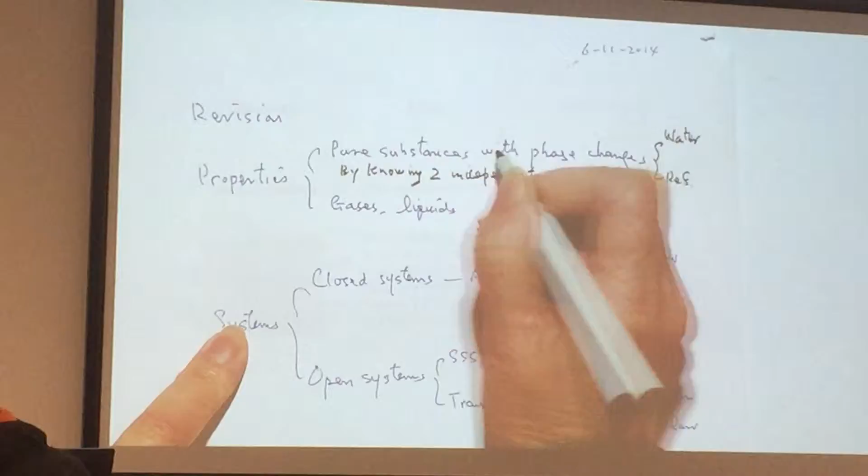We have used these methods since week 1, right? If we still say we can't remember, then our memory would be shorter than a fish's. Anyway, I just make a line here.

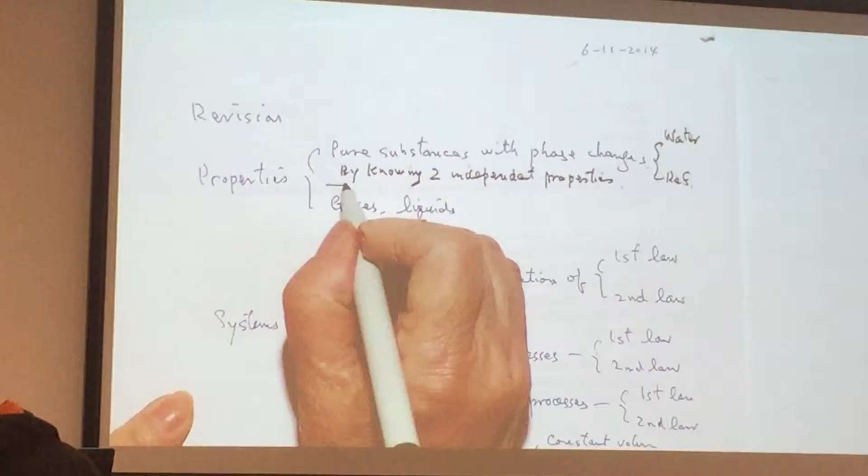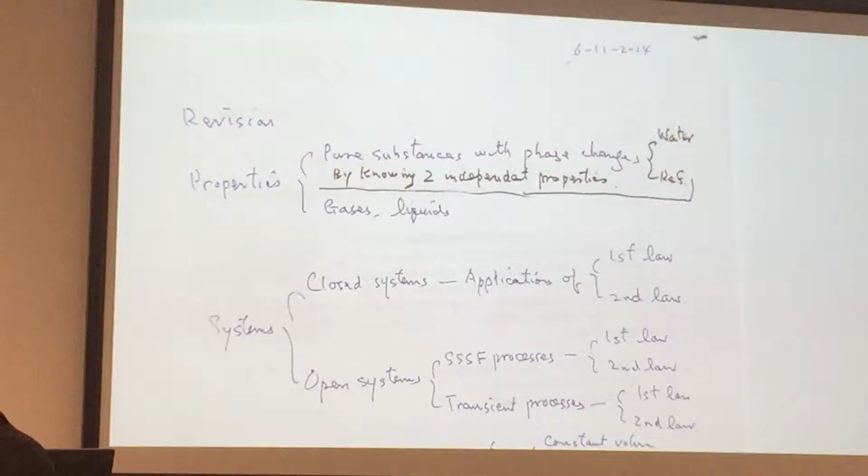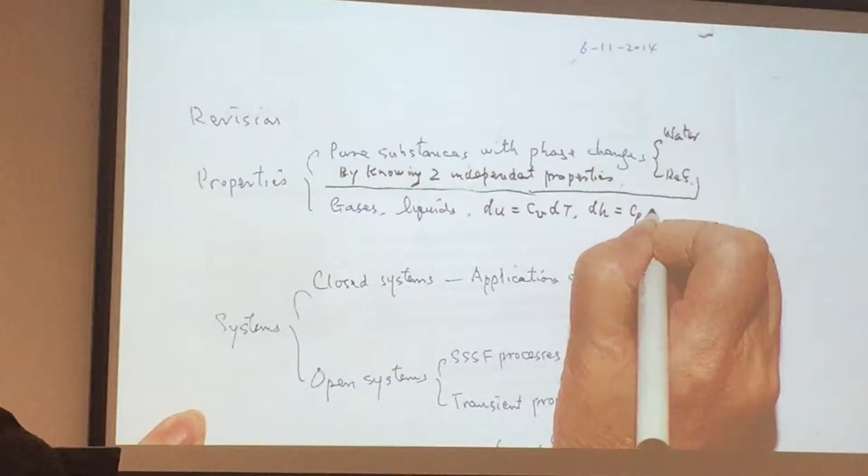And then ideal gases: we have PV equals RT, we have dH equals Cp dT, dU equals Cv dT. And also we have the formula for calculating the specific entropy change. I'm going to leave space for it later.

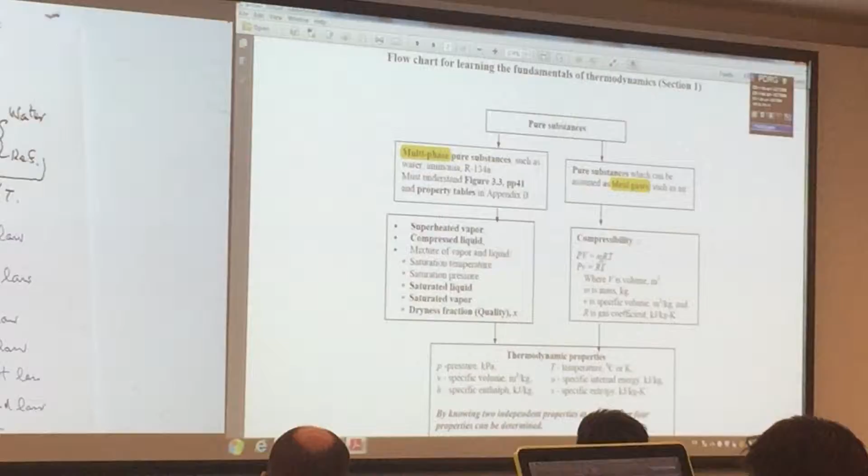And also in the study guide, on the second page, there is a flow chart to show you how we learn in order. Here I just highlight multi-phase pure substances. Actually, we have only dealt with water and refrigerants. And then ideal gases. And what are the 6 properties?

If we still don't know what the 6 properties are, we'll be in trouble. So I just listed, in week 1, the ideal gas law. And then all these concepts, do we understand them? Do they look very strange to us? What's saturation pressure? What's saturation temperature? What's quality? Why do we need quality when the state is inside the saturation region?

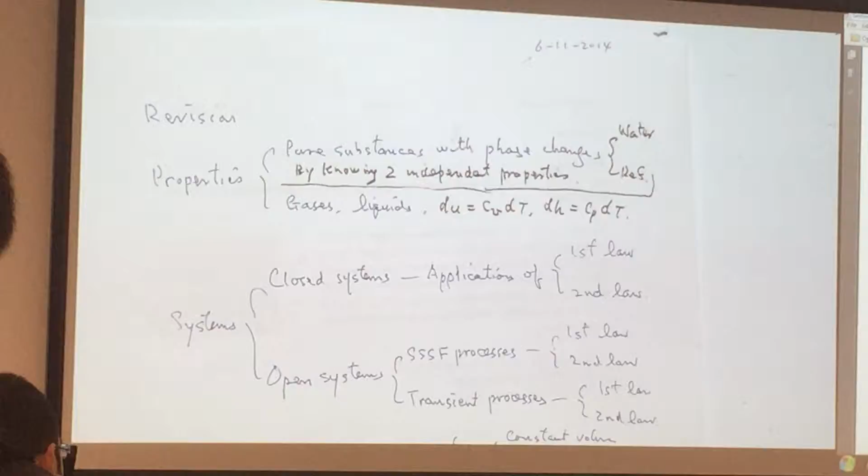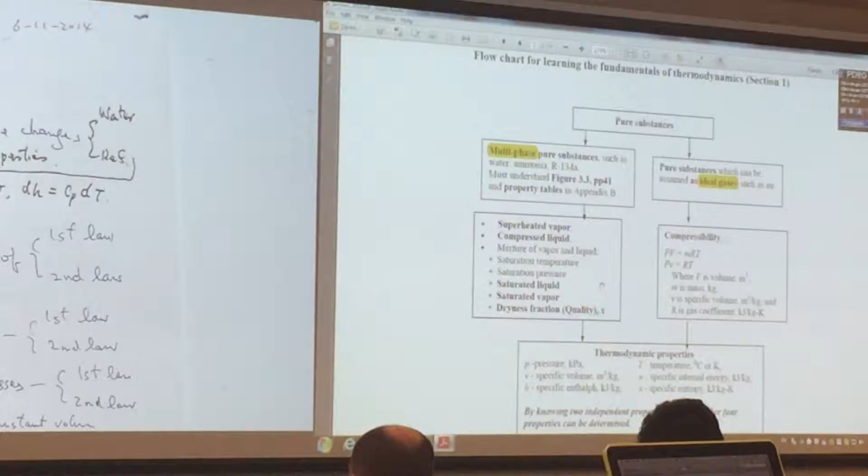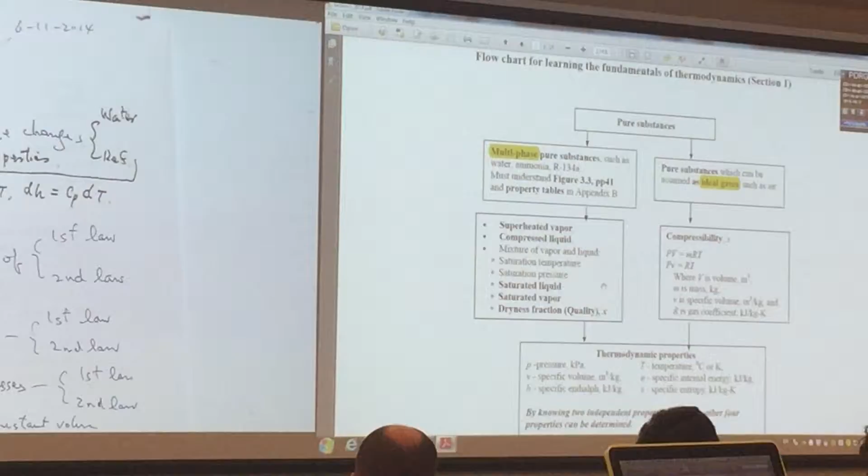Because saturation pressure and saturation temperature are dependent. If we know only pressure and temperature inside the saturation region, that's not enough to determine the other properties. That's why we need a special property called quality, which is defined by the mass ratio of the vapor. Mass ratio, not volume ratio. Just follow this.

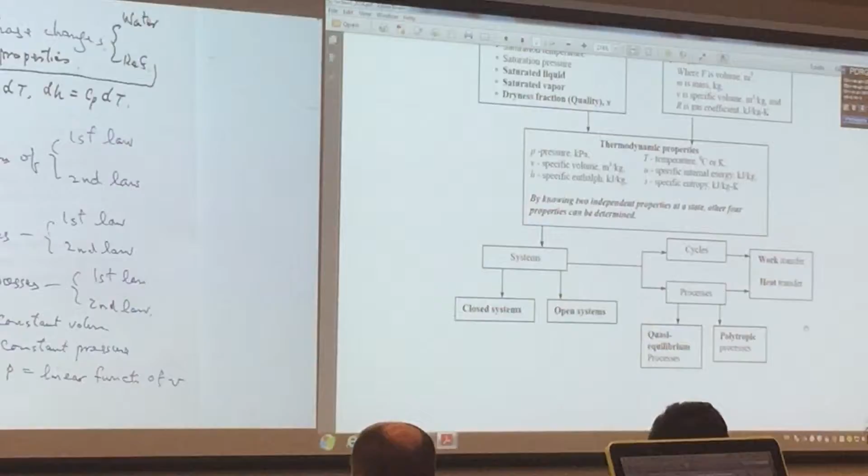For everything related to processes, we have dealt with 2 different systems, defined in terms of mass transfer across the boundary. One is called a closed system, the other is an open system. The major difference between these 2 systems is the mass transfer across the boundary. For closed systems, mass is constant. There is no mass transfer across the boundary, but it depends on where you define the system boundary. We will see some examples.

And the application of the first law and the second law to closed systems, what kind of closed systems we have had, and what kind of steady state, steady flow processes and transient processes we have learned for open systems. Both first law and second law. And you will see from the previous exams, the questions won't be only for the first law or only for the second law. They will be together.

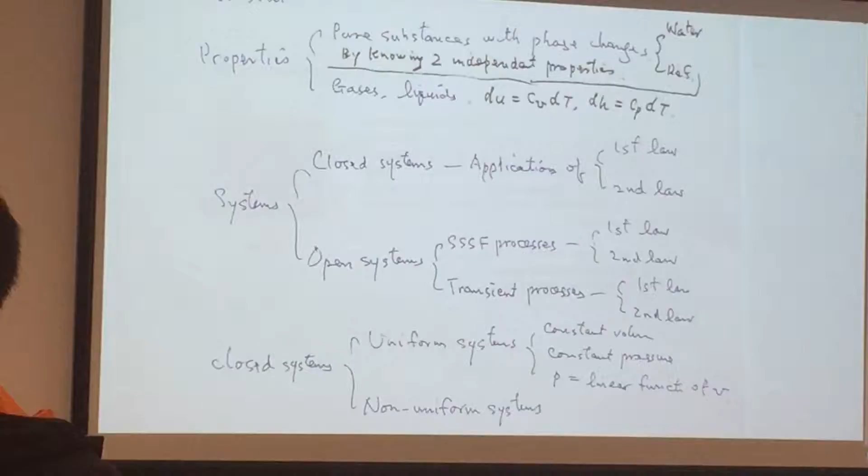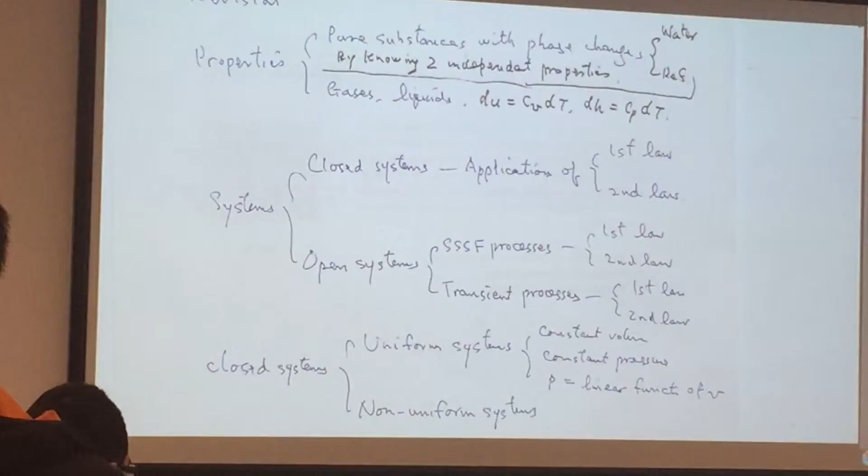For example, I've given a particular example: constant volume process, no moving boundary for a closed system. When you look at these equations, we must understand the conditions. What are the conditions? Kinetic energy change is 0, potential energy change is 0. So that's why the first law energy equation becomes like that.

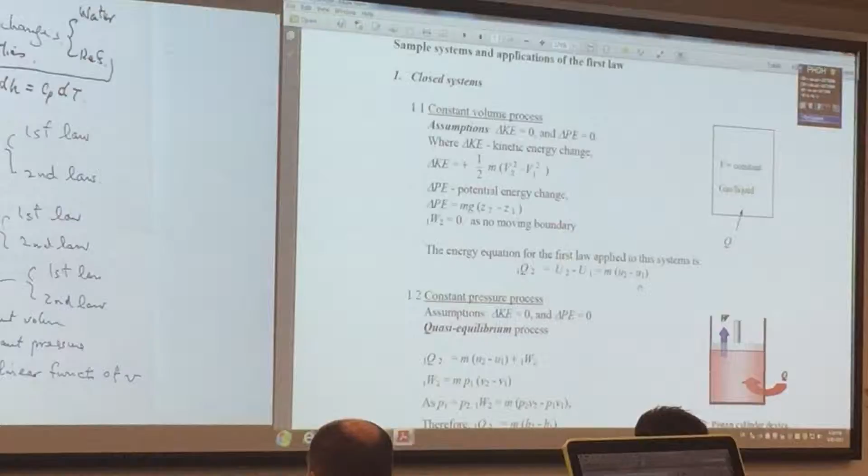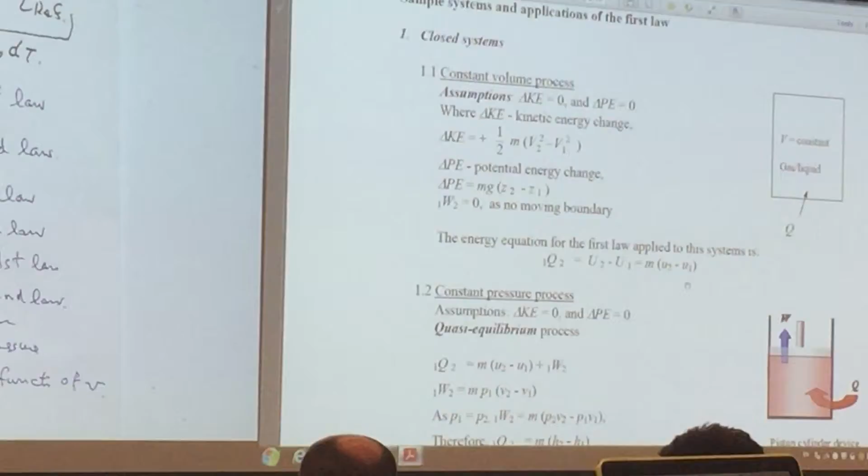And from here to here, if it's a transient process, we can't do that because mass is changed during the process. And in a closed system, mass is fixed. So we have total internal energy equal to constant mass times the change of specific internal energy. So what's the general equation, and how is it simplified like that? It's very important to understand the conditions.

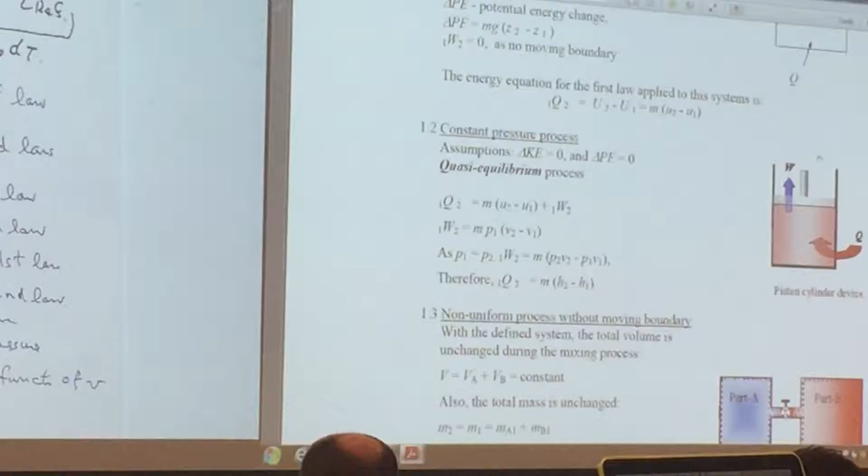Constant pressure process, that's our first quiz, right? I think we've done a lot of examples. Piston cylinder arrangement, that's the physical model. And it's a quasi-equilibrium constant pressure process. But in the macro scale, we assume the process is a constant pressure process because the outside pressure is unchanged and the process is slow enough for us to assume it's a quasi-equilibrium process.

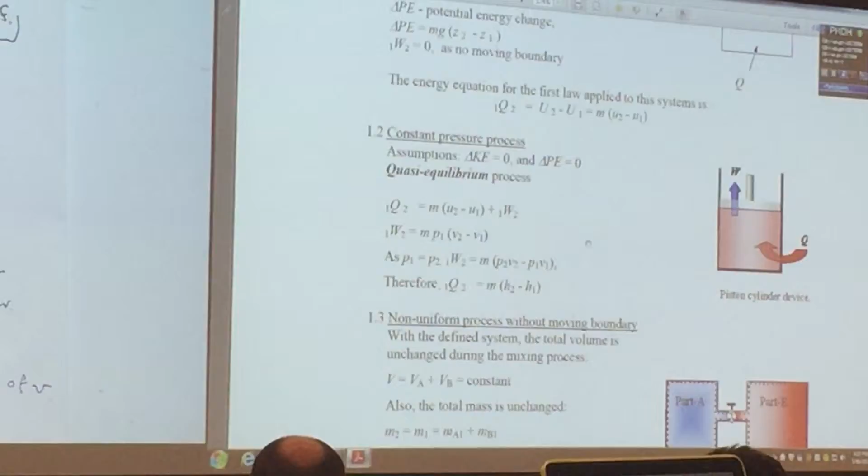If you didn't do well in quiz 1, or there's something you still don't understand, you must go back. Constant pressure process: in the closed system, how to apply the first law, how to apply the second law.

Closed system: if the system is defined like that, the process is started, in this example, by opening this valve. During the process, part A and part B have different properties. So it's called a non-uniform closed system. You can define two systems, but you will have two open systems, because there is a mass transfer between these two, and I explained why we need to define it like that: to simplify the solution.

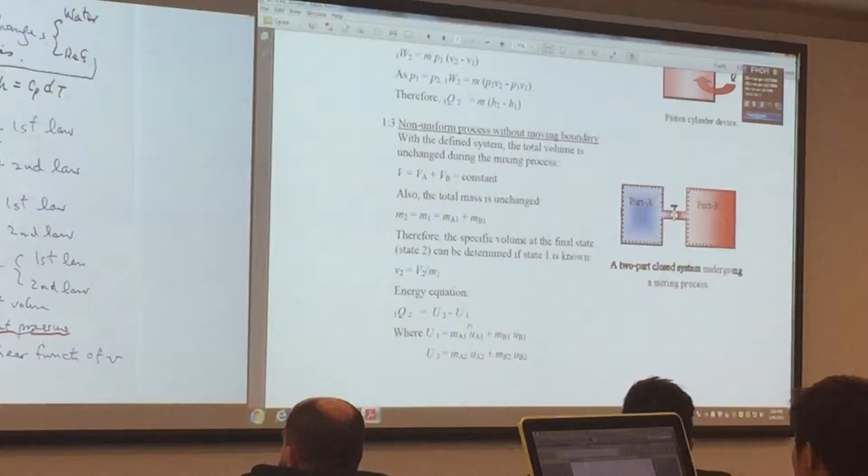And if the boundary is defined like that, then there is no moving boundary. That's why the energy equation is the same as the one for a constant volume closed system, when we ignore the kinetic energy change and potential energy change. However, the detailed calculation of the total internal energy of the initial state and the final state is different, because the mass transfer happened between these two parts internally. So you need to find out the mass in each of the parts in order to find the internal energy at state 1 and state 2.

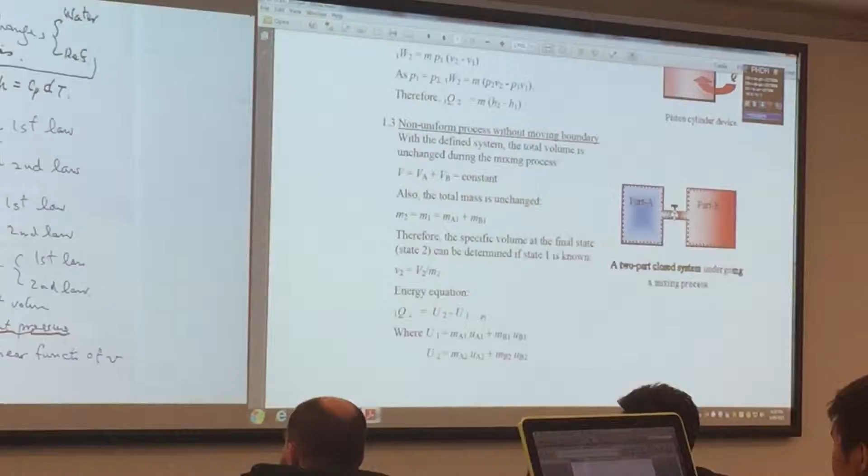The other concepts, like properties, are only functions of the initial and final states. It doesn't matter what happened during the process. The property change is only calculated from the initial property and final property. But heat transfer is a function of the path. Why? Because heat transfer is equal to property change plus work transfer, and work transfer is a function of path. So all these concepts you need to revise.

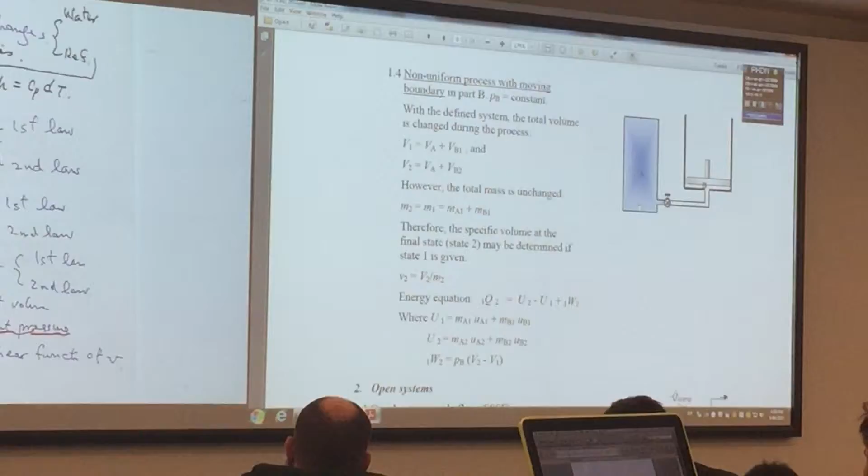And that's another example: non-uniform system with moving boundary. But here, the most complicated case is a constant pressure process in part B. Nothing more complicated than this one. And then the volume change. We know in a constant pressure process, work transfer is equal to the pressure times the volume change. In this case, volume change is only the volume change in part B.

So here, just to give the equation, you can see now work transfer is not 0. But work transfer is easy to calculate as long as we know the volume change in part B. In part A, volume is unchanged. But normally we look at the total volume, including part A and part B.

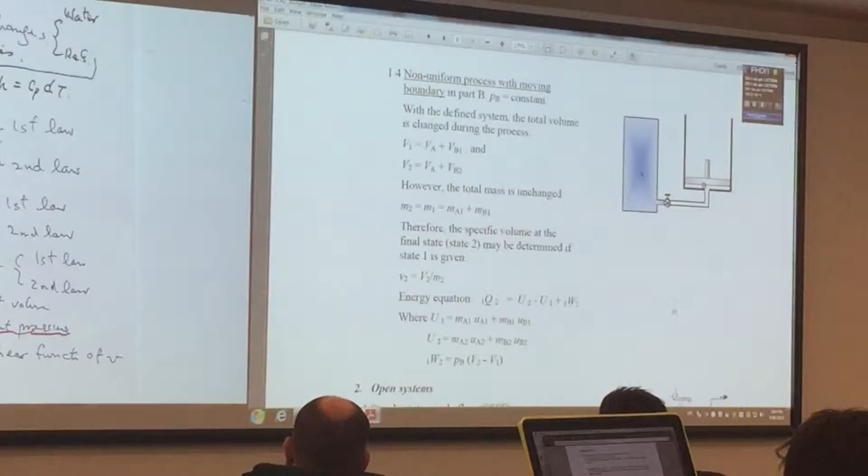As for closed systems, here I have some more examples not listed in the study guide. For example, if the function between the pressure and the volume is controlled by a spring, then it will be a linear function, and the work transfer is proportional to the area under this straight line, bounded by V equals V1 and V equals V2.

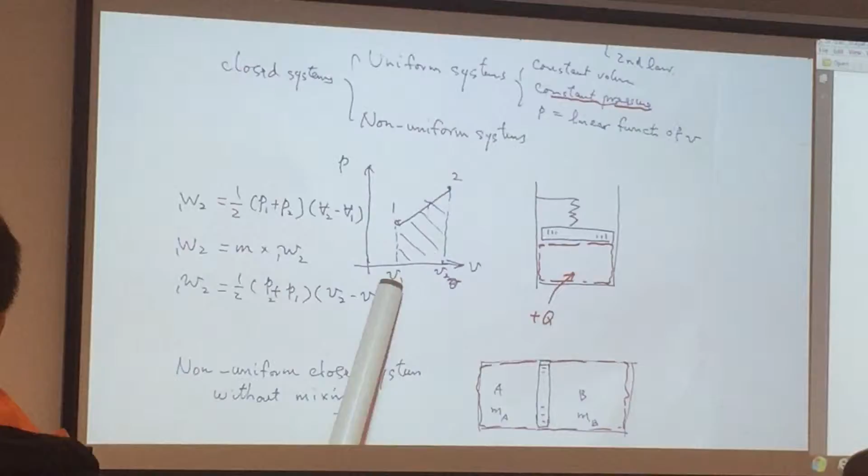And this is not only for this example. For all work transfer, the integration of P dV, the result is like that. So it must be on the PV diagram.

Okay, the proportion actually is the mass. Okay, so this area, the value of this area multiplied by mass. This example just means as long as we know how to calculate this area, you may not need to do the integration of PdV. Okay, that's something you learned from high school, the average height multiplied by the base. Okay, so that's the area.

And also another non-uniform system, internally with a moving piston. But in this case, actually, if we define the boundary with the red line, there is no moving boundary. Even though the piston is moved because of the pressure differential between part A and part B, it doesn't cross the boundary. Okay, so all these concepts are important.

That's why rather than memorizing the solutions of particular examples, we'd better just master the concepts. Doing the examples is to enhance our understanding of these concepts. You can feel this subject is very different. This subject, fluid mechanics and heat transfer are the three subjects in one stream, thermofluids, but you can see they're very different.

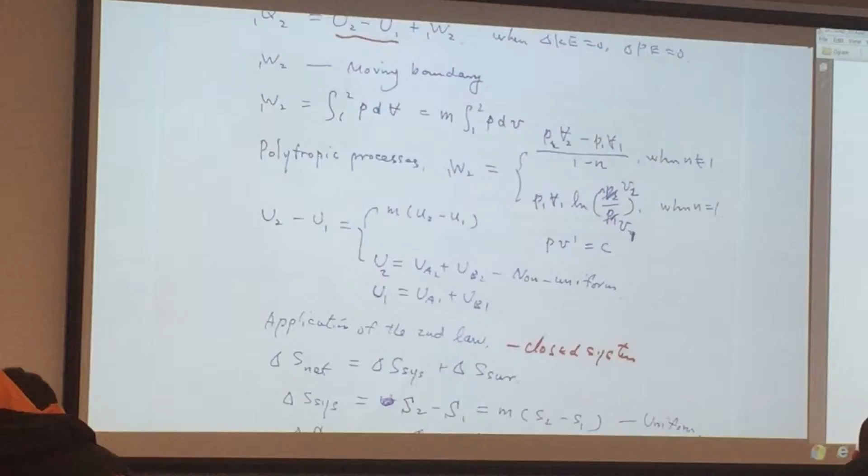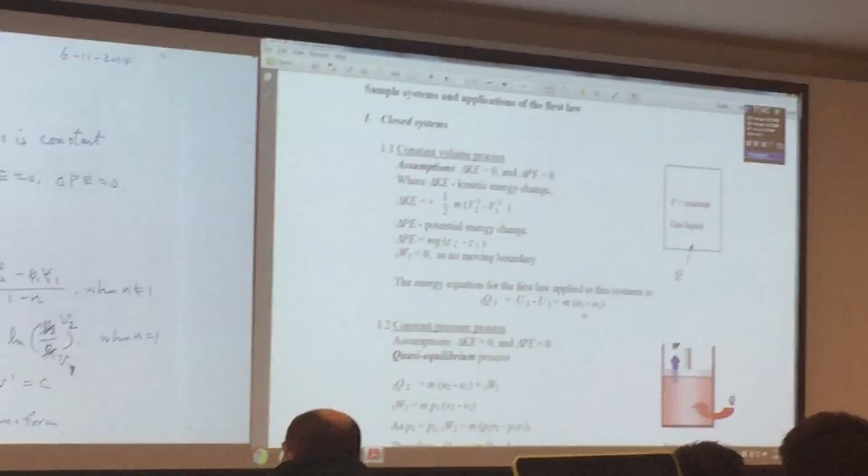Anyway, okay, and then for the examples we have had here, closed system. Application of the first law, in most cases we have ignored kinetic energy change and potential energy change for closed systems, okay? And then the definition of work transfer, and also work transfer for different processes. In addition to the constant volume process, constant pressure process, and the linear function between pressure and volume, we have learned the polytropic process. The polytropic process is a typical process in an engine, the compression stroke and expansion stroke in an internal combustion engine.

And also for the polytropic process, you don't have to, if you have a question, I didn't mean you must have a question like that, you don't have to derive the formula like that, okay? But we need to understand the index equal to 1 and not equal to 1. We have two different integration results.

Yes? Did you say that you use internal energy when you have a constant volume process? No, polytropic process. The compression process is a polytropic process. The expansion process is another polytropic process. Constant volume is the combustion process in the Otto cycle. Yeah, we'll quickly go through that, even though we only had that last week. Is that your question? Yeah, okay.

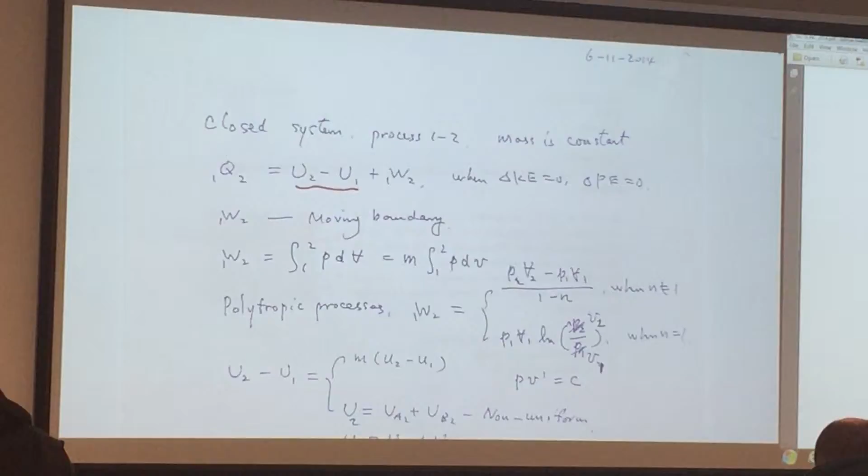Total entropy change, net entropy change, total entropy generation is equal to the system entropy change plus the surrounding entropy change. But we need to understand for different systems how to calculate the system entropy change and how to calculate the surrounding entropy change. Okay, that's the key thing. Knowing this first, but the detailed calculation of the system entropy change and the surrounding entropy change, we need to understand this.

For a closed system, it's simple. System entropy change is just the system specific entropy change multiplied by mass. Okay? And then how to find this depends on the working fluid, whether it can be assumed as an ideal gas or not. Okay? Even for an ideal gas, whether you are going to assume Cp, Cv constant or not. Okay? And the surrounding entropy change for